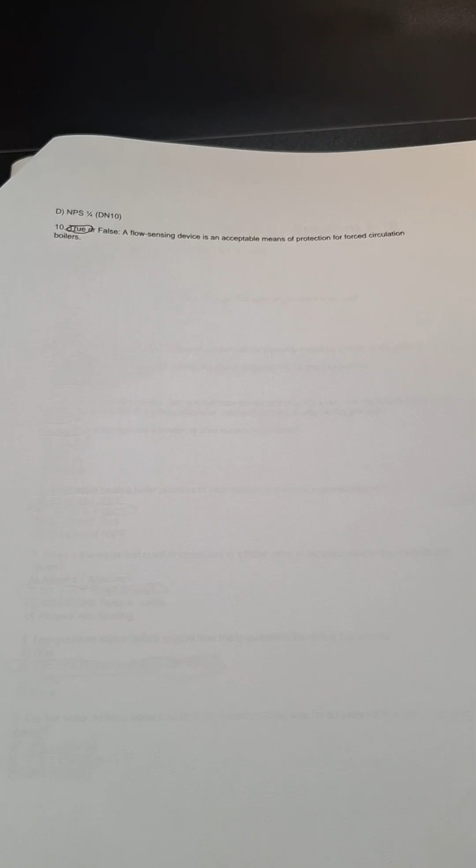All right, so number 10, true or false, a flow sensing device is an acceptable means of protection for forced circulation boilers. I've got that as true.

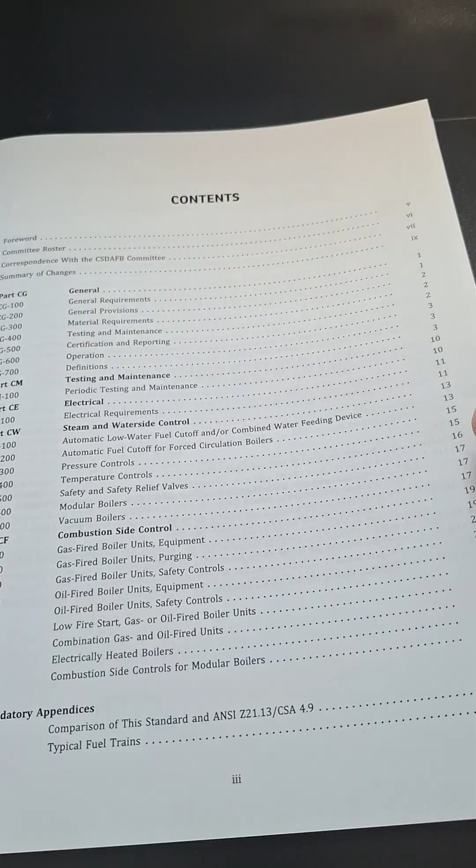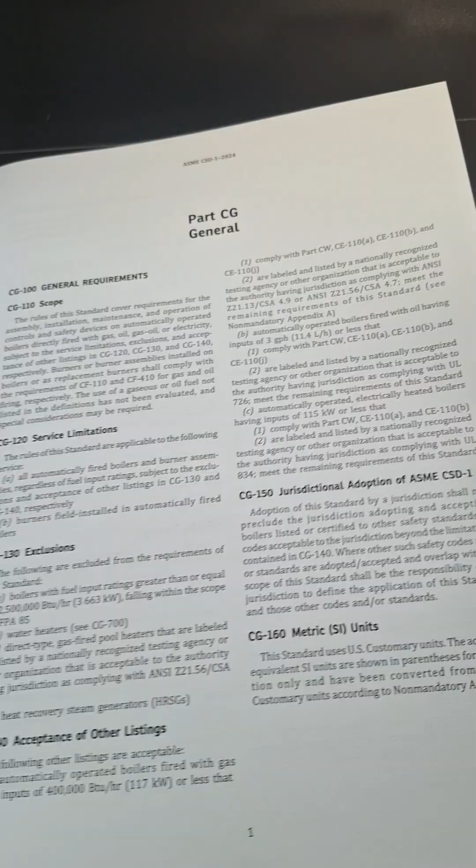All right, let's go over this book, and I'll show you where I've highlighted. It says that you can tab these. I just didn't find it really necessary. What I did do is dog-ear pages, highlighting important parts. But I'll give you a look here if you see something you want to pause and read, if you haven't ordered this book yet and you just want to see what it's about, or maybe you have a previous version of it.

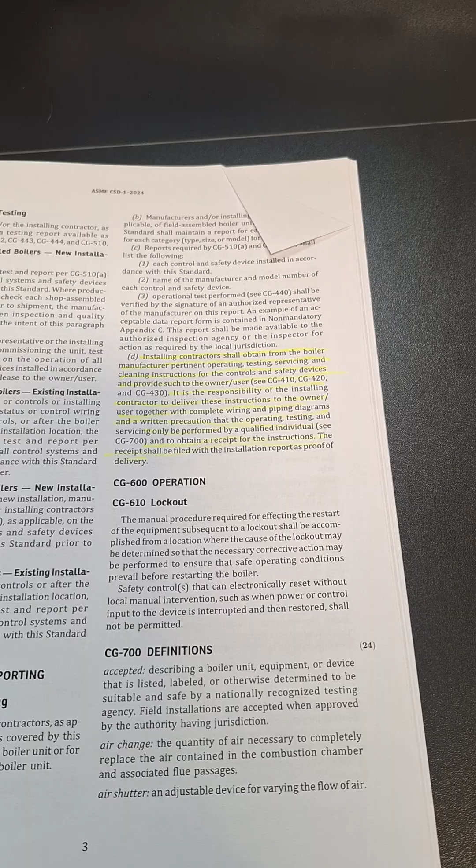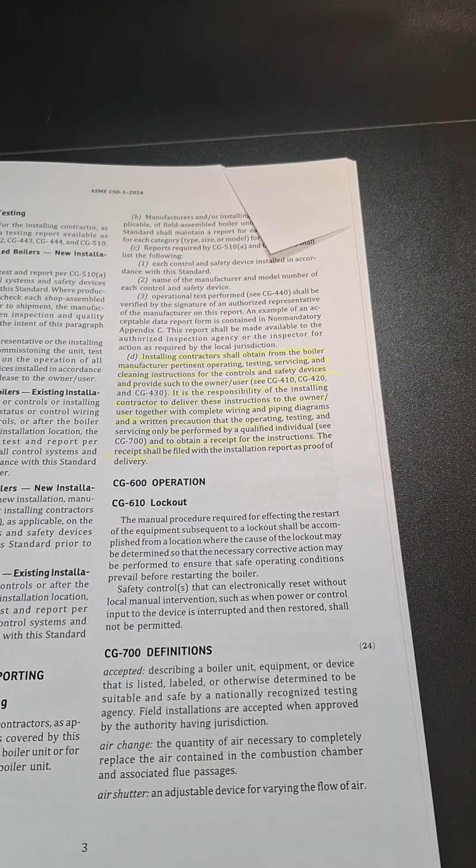Okay, so here's a part. This is about what you've got to leave with the owner, the pertinent operating, testing, servicing, and cleaning instructions. The installing contractor is responsible. That is under CG-510, part D. Okay, so let's see, I thought maybe there was another spot. The other thing too would be knowing your boilers, the limits of what we're able to install when we get approved for this.

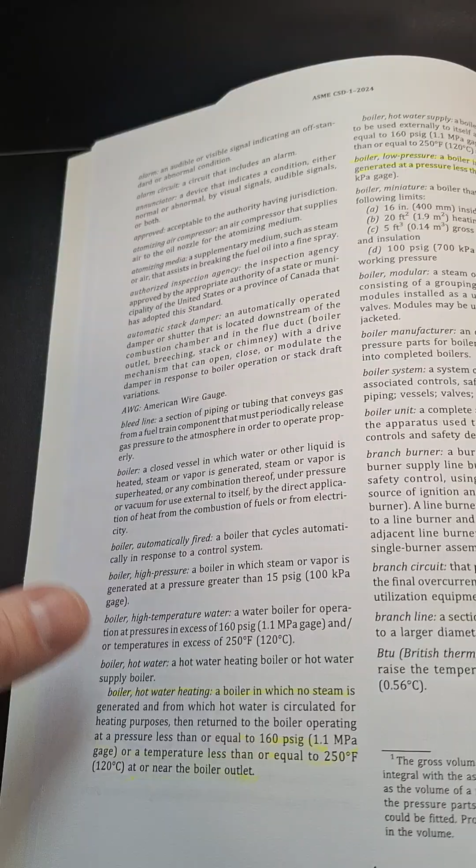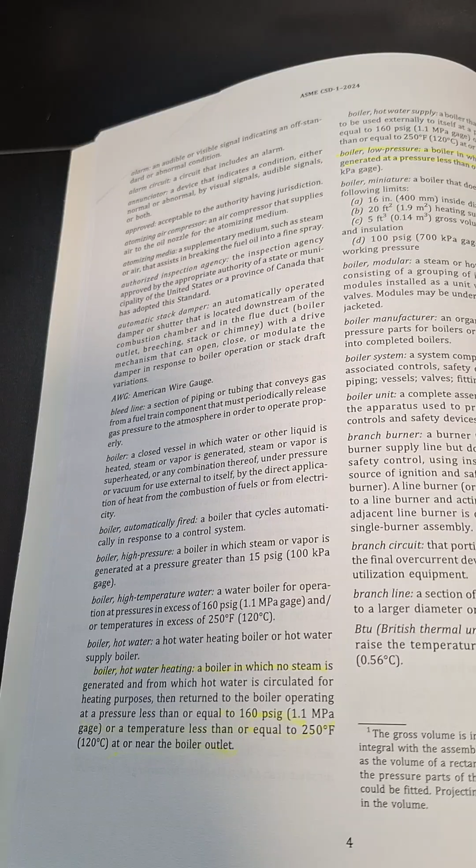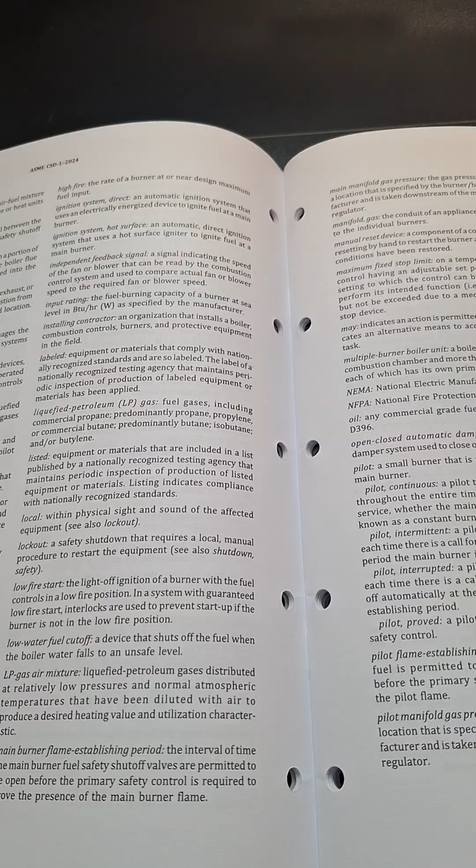Million BTUs or less is going to be the limits of your license. And then also here, this talks about the hot water heating boiler, pressures, temperature. Up here, that's low pressure. And that's going to be just in the definitions there. CG 700. Those were the two that I kind of highlighted. I don't think there was really any other ones that really stuck out at me.

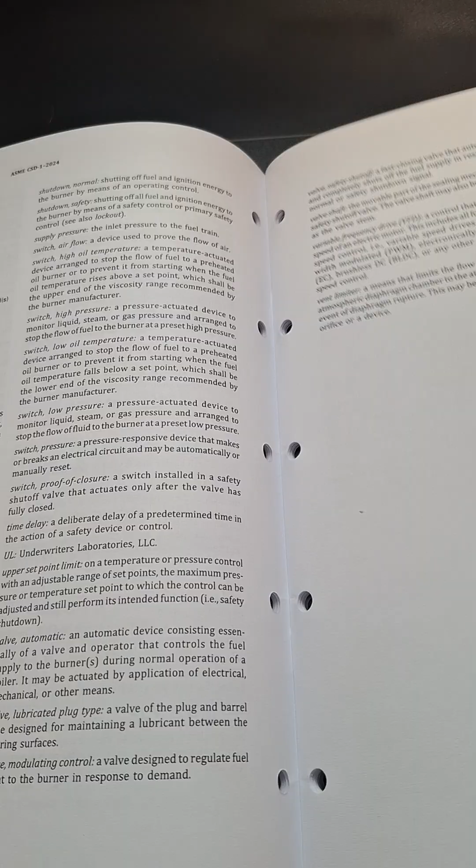I don't think I put it in here as far as where I found the information about stamping, the one we talked about, the HW or H. I think I kind of Googled that one. I don't remember seeing it really in any of my books. That's talking about electrical. Okay, here's the part about steam and water side controls. That's CW 110. I've got section D highlighted.

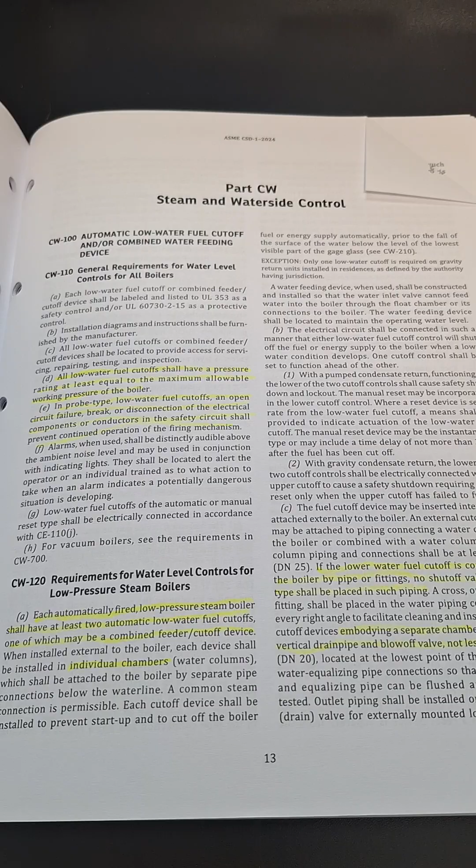All low water fuel cutoffs shall have a pressure rating of at least equal to the maximum allowable working pressure of the boiler. From what I remember, I think there was a question on there about a backflow device. It said something along the lines of a backflow device was not rated for the pressure or temperature of the boiler. What should be done? I think it gave you two options, if I remember right.

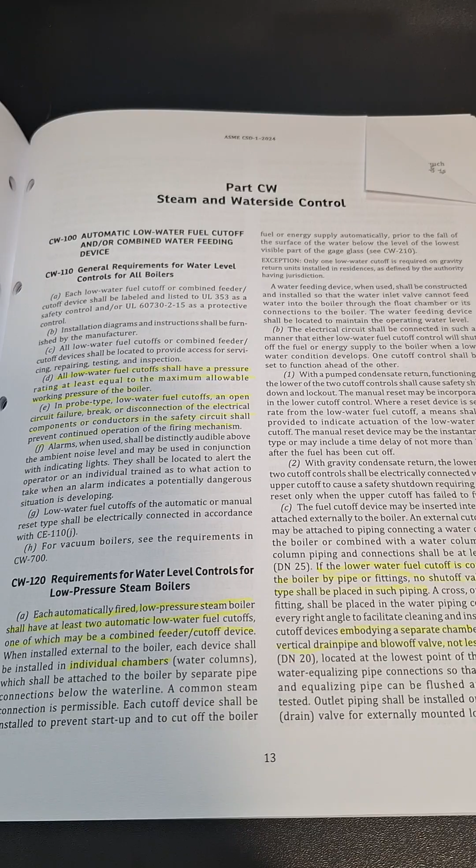I think the first one was remove it, install a correct one that would have the correct rating for that boiler, or option two, which was basically put a check valve in on there. I picked A. I really haven't found that, but this kind of makes me think about, you've got to have proper low water cutoff that's rated for the boiler pressure and temperature.

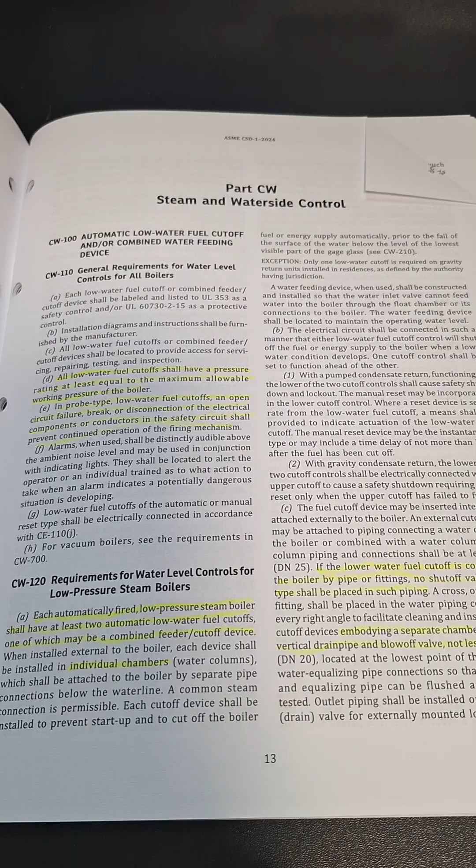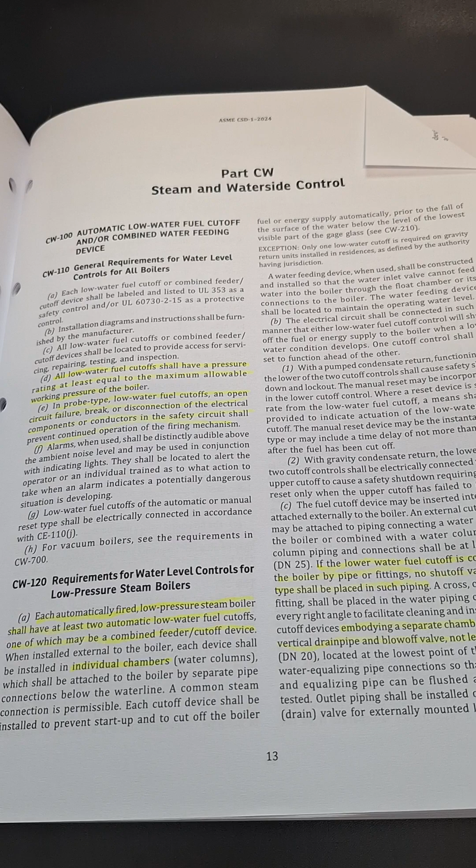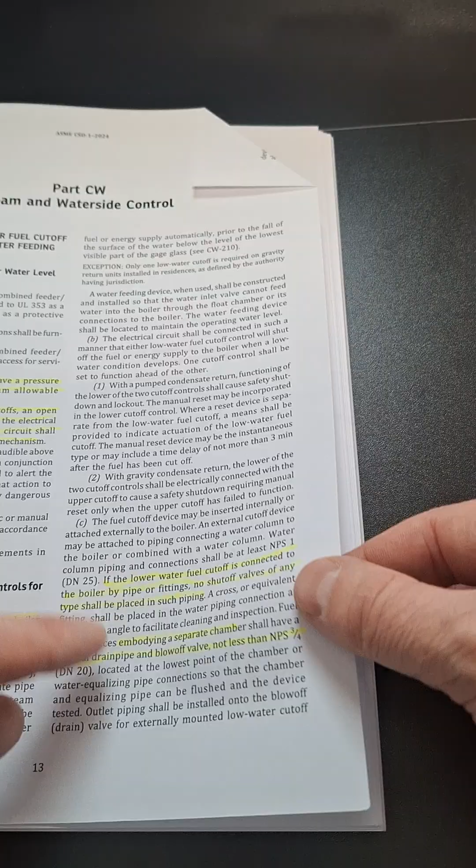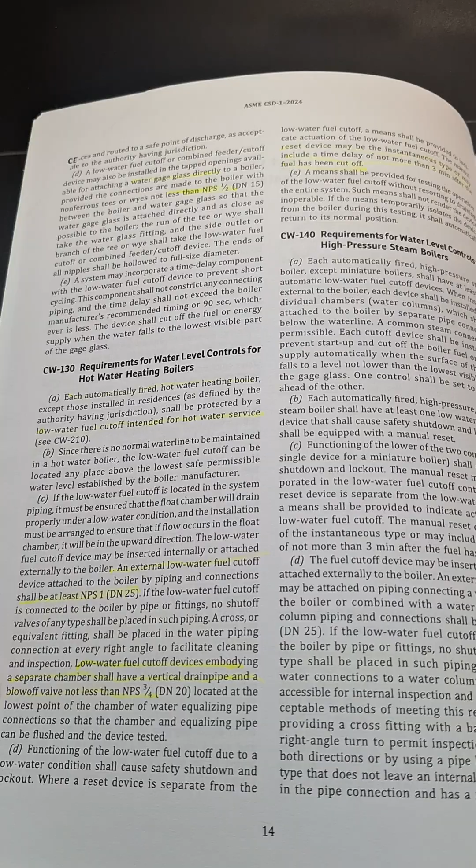Here's the other two here, probe type low water fuel cutoffs. Here's another section, CW-120, about, we talked about having two low water cutoffs, individual chambers. Let's see here. Here's a part about pipe sizing. Okay, and then up here I've got water glass directly and pipe size for that. This is basically talking about hot water boilers, pipe sizing for low water cutoff. This talks about reset for them.

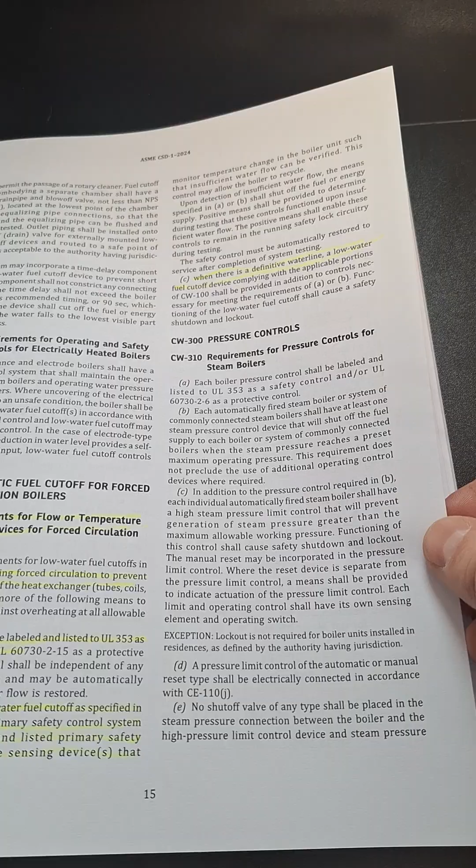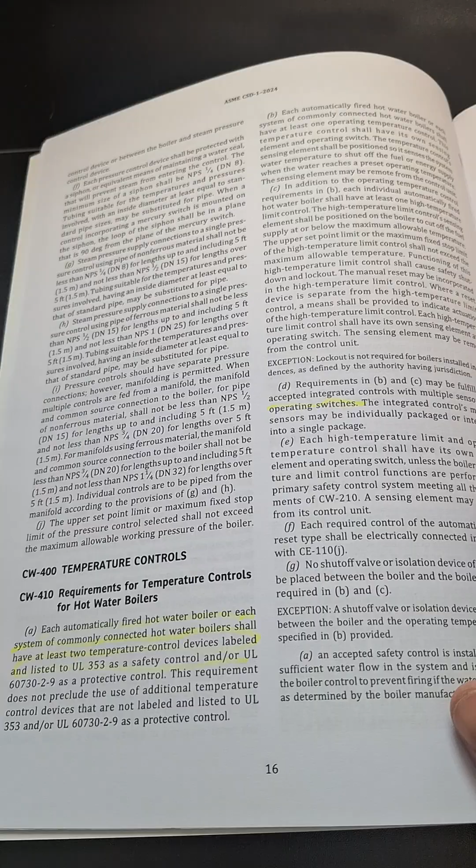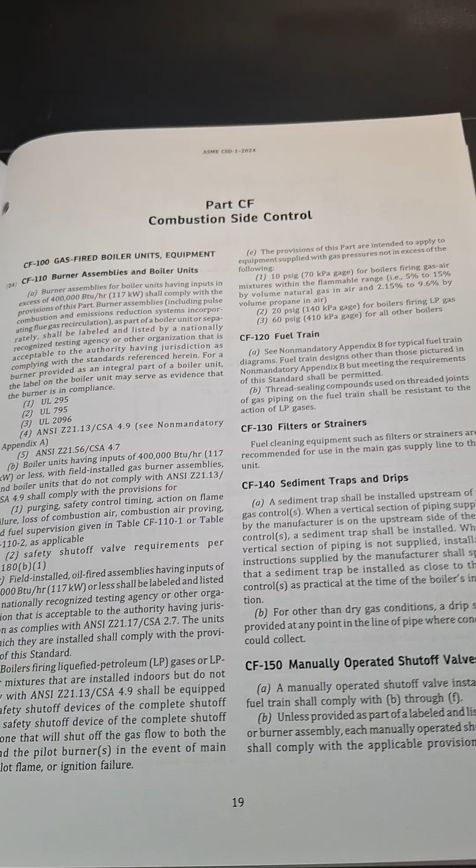Okay, if we come over here, that's talking about boiler requiring forced circulation. A flow sensing device is approved. That's CW 210. Also talks about here a water line for a fuel cutoff device. All right, here we're talking about temperature controlled devices. I don't remember that really being on the test. Right here, multiple sensors and operating switches. I highlighted that section. Okay, that's combustion side controls.

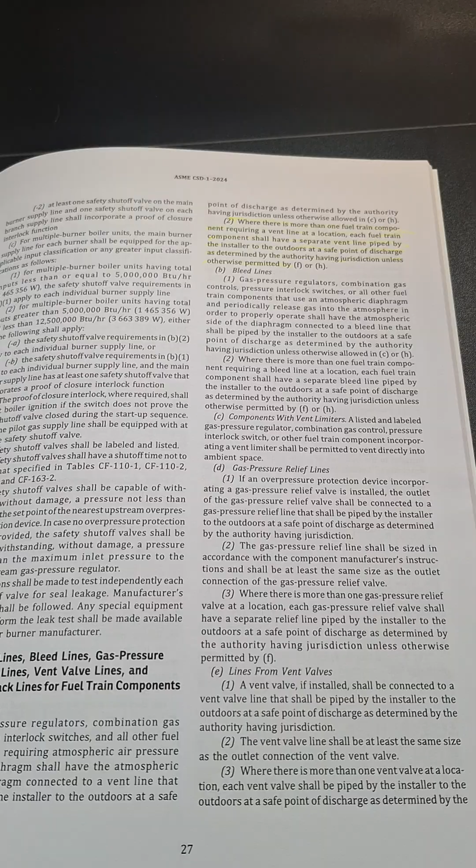I'm trying to keep this moving along. I know if you're trying to study, a long drawn out video with just me turning pages is probably not very interesting, but I want to highlight areas that I think are kind of important. Here, this talks about where there's more than one fuel train component requiring a vent line at a location.

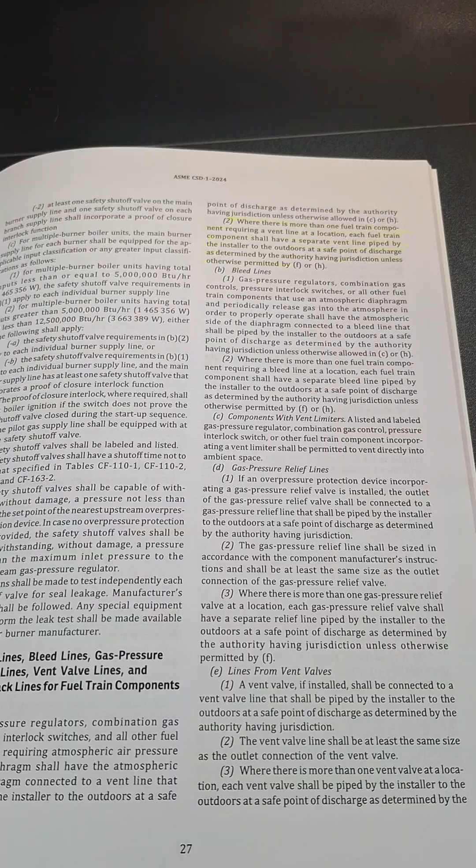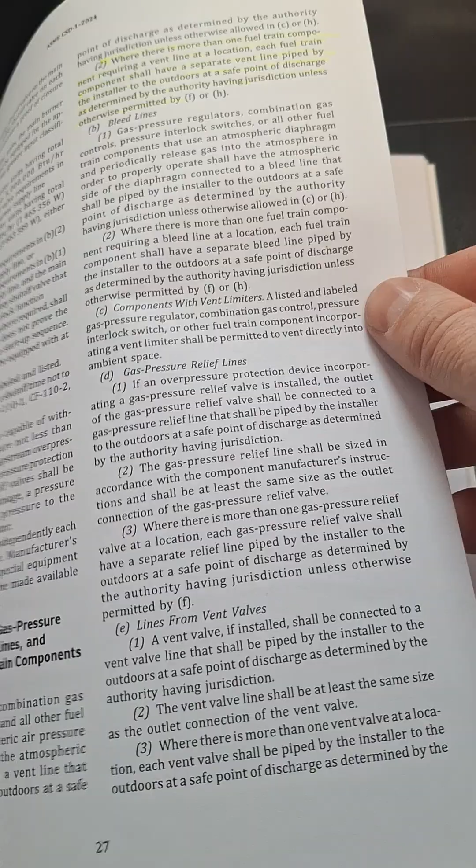Each fuel train component shall have a separate vent line piped by the installer to the outdoors at a safe point of discharge as determined by the authority having jurisdiction unless otherwise permitted by F or H. And here's the part about F. Basically, if approved by the authority having jurisdiction, it talks about minimizing back pressure. The manifold line shall have a cross-sectional area not less than the area of the largest branch line.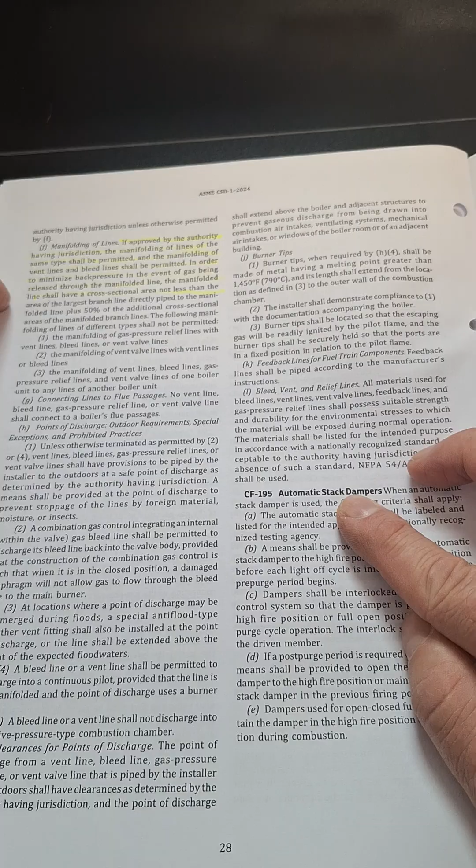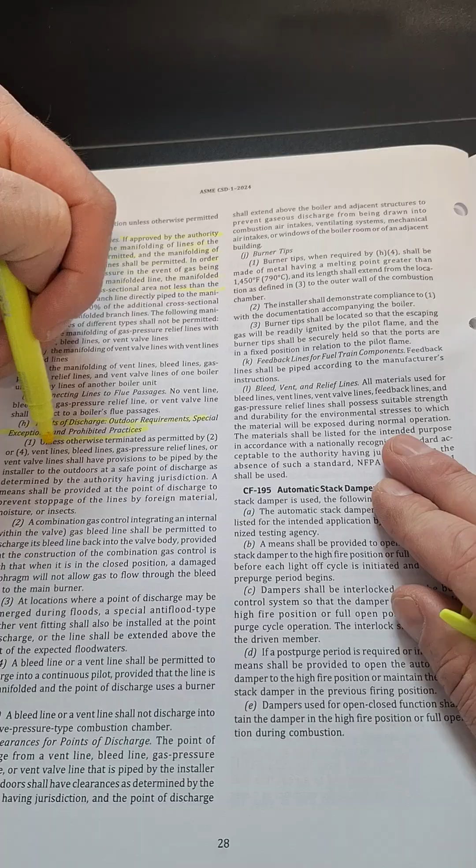Okay, and then we had H. Points of discharge, outdoor requirements, special exceptions. That's right there. Probably should highlight that, because I'm pretty certain there's a question on there about venting the gas trains. So I would say that would probably be an important part to highlight.

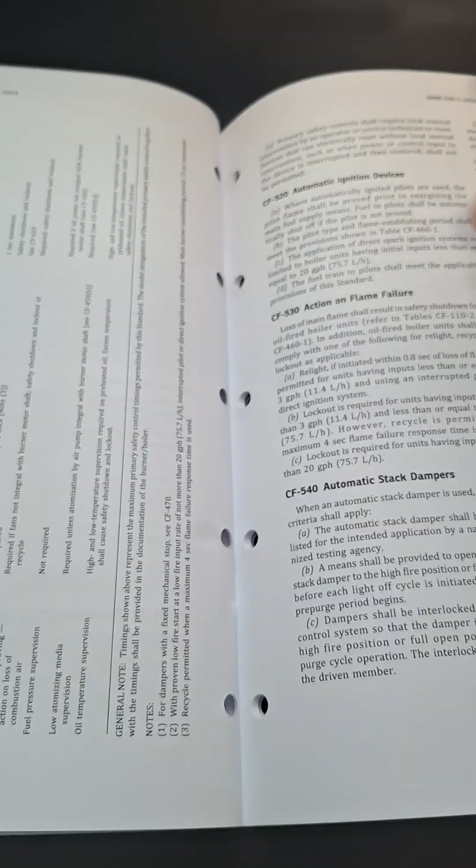Nothing really high, and I would tell you, go through this book. You know the ins and outs of it. Read it. You know, tab it if that helps you. I just kind of dog-eared it.

Okay. Here's the part we were talking about, the CSD-1, the appendix for that, and then it kind of tells you certification and reporting for controls and safeties. That's Appendix C. That's that question I talked about. I think that was pretty much it in here. So that kind of covers this book.

And like I said, we're going to take it one book at a time of each question. We'll do 10. Test is 50. Key points I would tell you that are fresh in my mind right now.

Keep in mind that in Michigan, as far as your license goes, staying in your lane, meaning if you're approved to be licensed in a certain area, let's just say you're approved to be a boiler installer, you shouldn't be running domestic water lines to your boiler. If that's the case, you want to have a plumber come in. If you're putting a new boiler in, that's not part of what you would do.

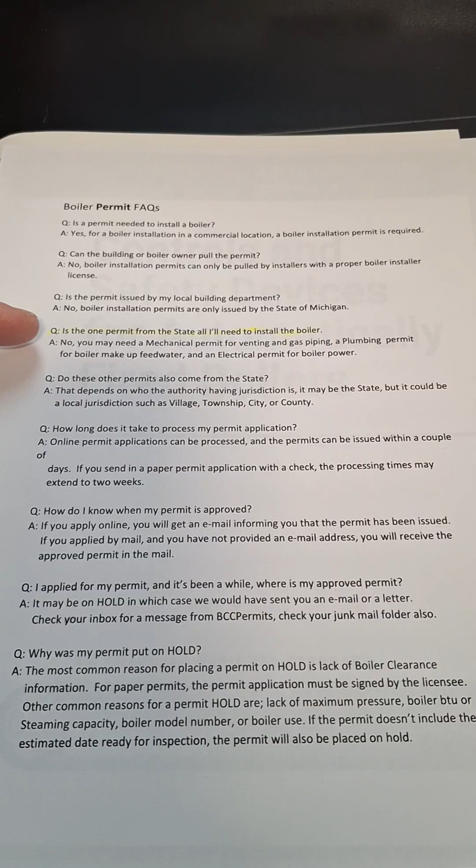Other thing I would tell you is I kind of remember there's a question on there about permits, like who would be able to pull a permit or licensed, which kind of covers the frequently asked questions on the Michigan boiler page. This would be one I would highlight, because I do know there was a question about this: is one permit from the state all you'll need to install a boiler?

No, you may need a mechanical permit for venting, gas piping, a plumbing permit for boiler feed water, an electrical permit for boiler power. Keep that in mind. I would say that's probably an important thing for that test. I remember there was a question on there about sections. Who can repair sections in a boiler? That would basically come down to a boiler repair license. You would have to have that.

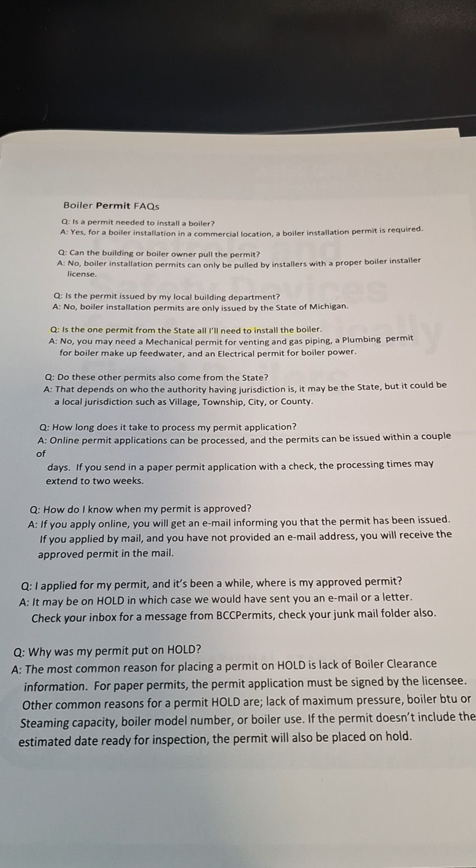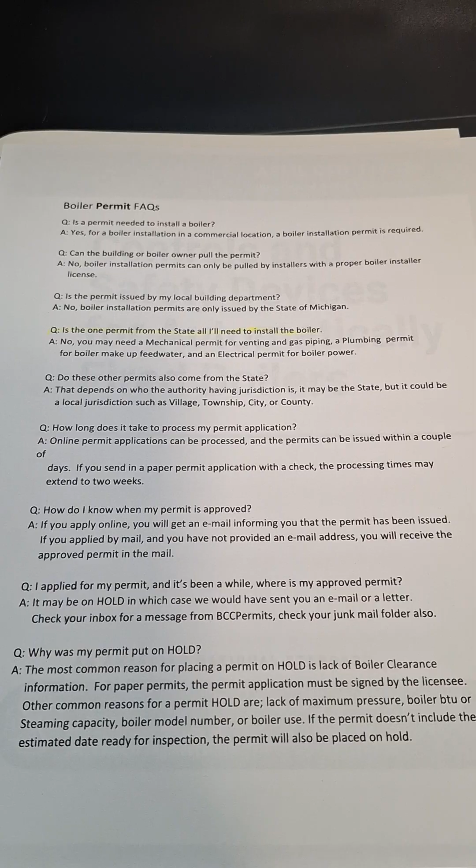I think there was a question on there too about how many permits you would need. I think it was about the sections in a boiler, and I believe for every section you replace, you would have to have a permit for that section. Same thing with the boiler. If you're replacing more than one boiler, you would need multiple permits. We'll get into that because I'm planning on printing off a Michigan boiler permit, and that may have the information on there as well. But let's keep that in mind as far as testing goes.

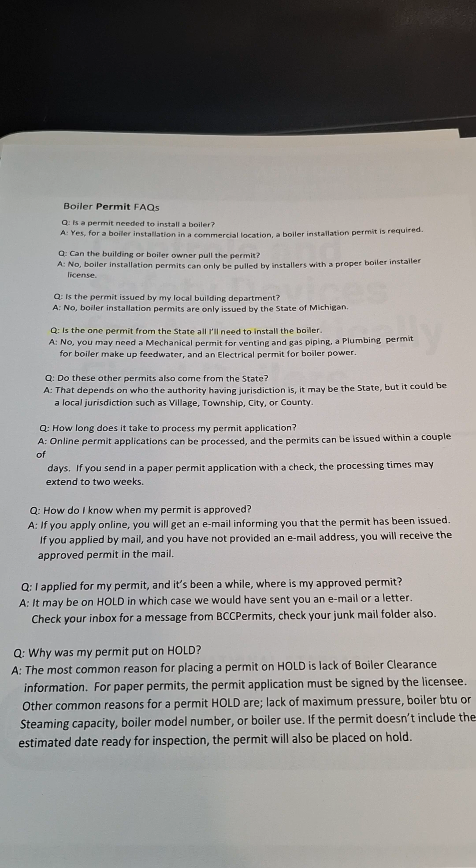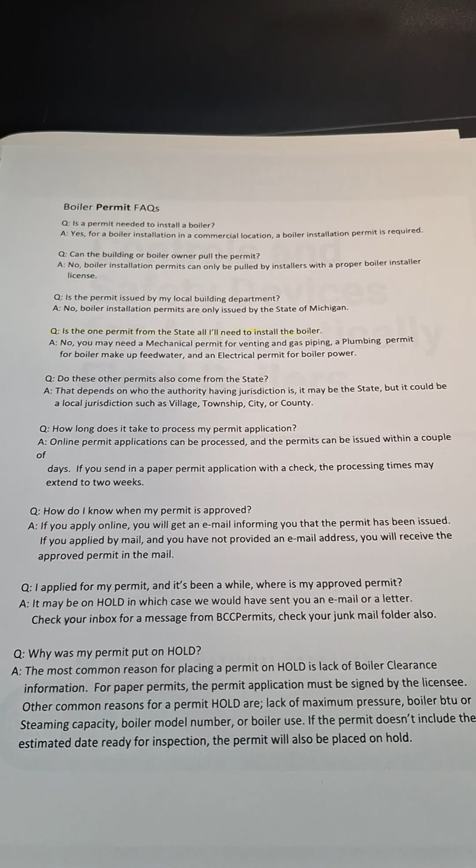I'm trying to think of anything else. Keep in mind, before you can start installation on a boiler, you have to have a permit, and that was the other thing in one of these frequently asked questions. It's right here: "Can I install the boiler, then pull a permit?" No, an approved permit must first be obtained before installation can begin. Applying for a permit is not obtaining a permit. You will know your permit is obtained when you receive the permit by email.

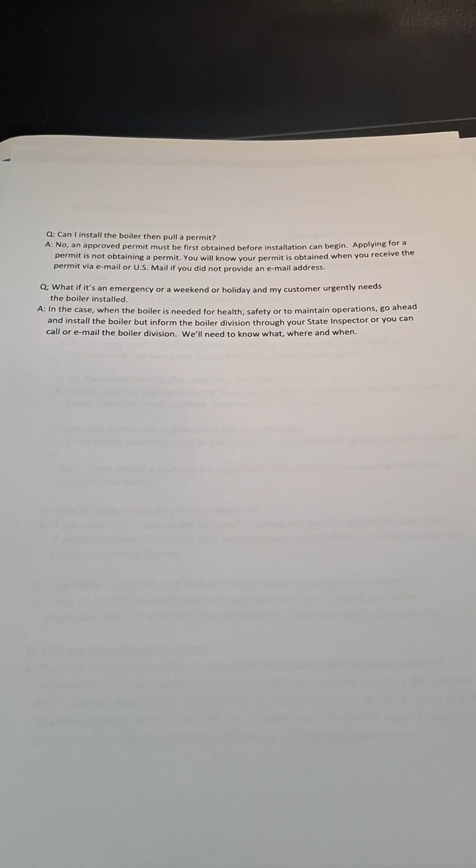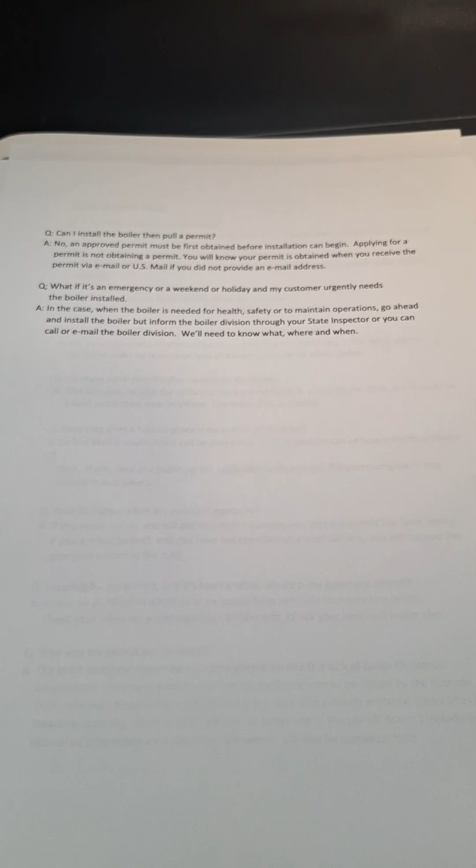Other thing would be, what about emergencies, weekends or holidays, when the customer urgently needs the boiler installed? Basically it says, in the case when the boiler is needed for health, safety, or to maintain operation, go ahead and install the boiler, but inform the boiler division through your state inspector, or you can call or email the boiler division. We'll need to know what, where, and when. So that's the key thing too.

In my mind, when I see these questions, I always try to think stringent, what's going to be required. So that would be the key thing. Don't install it until you have a permit. One of the other things too is starting the boiler. I think that was a question as well, which is basically you've got to get it inspected first before you're actually supposed to fire it up. So keep that in mind. That basically comes down to safety.

Also, there was a question on there, and I didn't like the way this one was phrased, because basically it was worded to the effect of, if you install the boiler and it didn't meet the requirements, that you could lose your license.

Which, to me, that's one of those where if I pull a permit, I install a boiler, it doesn't pass inspection, I'm going to get red tagged on it. I'm going to get the ability to fix what the inspector has red tagged. I'm not going to lose my license over it.

Now, I can see losing my license if I didn't pull a permit and they caught me. Then I could see. But then again, if it's because I didn't pull a permit, usually that's one of those where they fine you. Now, obviously, if you are installing a boiler and you don't have a license, how are they going to pull a license you don't have?

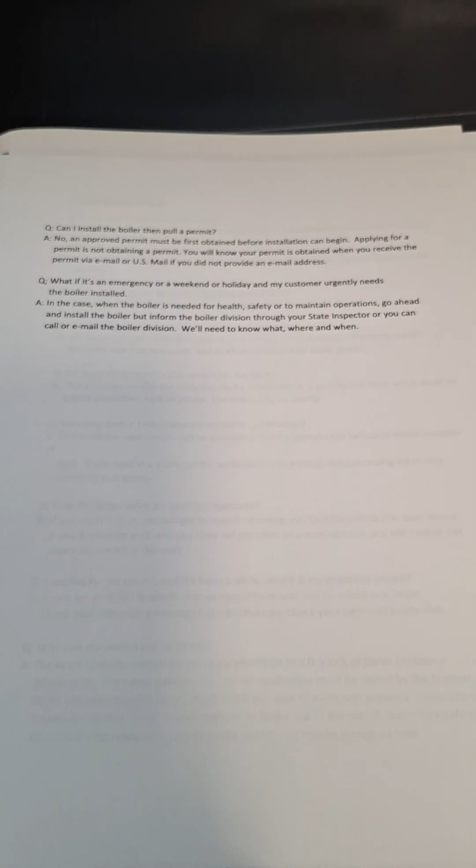And like I said, thinking along the lines of stringent requirements from the state. So, maybe they want you to say, yes, true, that they can pull your license. But like I said, I'm looking at it from the standpoint, if you didn't install it correctly, I can't imagine them pulling your license from that. But that would be one of the questions as well. But I would say, if you get that book, kind of highlight those areas. That would be the key thing.

Size requirements, as far as pipe sizing, not necessarily like discharge pipe sizing, but those areas that I kind of highlighted. Knowing that the gas train vents have got to be vented to the outdoors, you can tie them together only if it's accepted by local authority, which I can't remember how that was phrased, but I would just say, kind of keep that in the back of your mind. I'm trying to think of anything else on this section. I'm trying to keep this video short, so you can kind of cover these books.

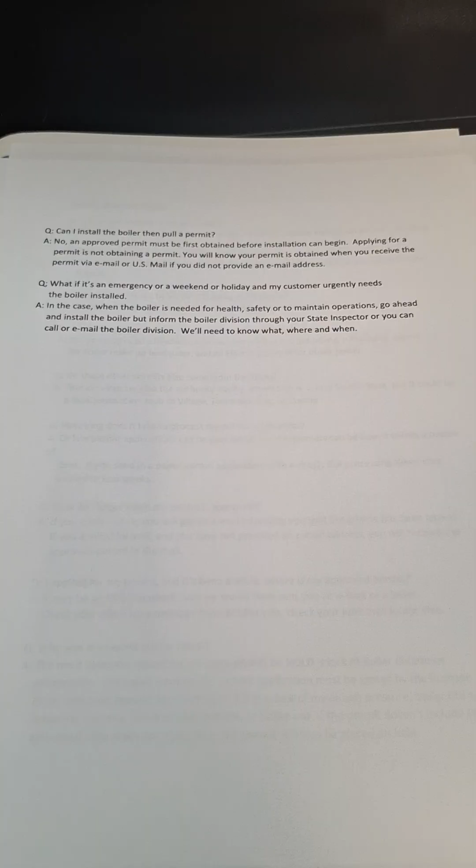We'll do sample tests, but I would say, know the boiler, the low pressure boiler, the 15 psi, the hot water boiler up to 160 psi, 250 degrees. If you know that, I'm pretty certain that was a question on there, because you got to basically know what the test is as far as your licensing requirements.

One of them I'm thinking of is the CSD1 testing that was on there. Who can test controls? I think it said boiler installer, boiler repairer, mechanical contractor holding an unlimited license, and the person that's going to be able to test these controls is the mechanical contractor that has the unlimited heating service license.

So I would say, know that. That's not really what we're testing for, but that goes back to staying in our lane. Even though we're an installer, if we're going on a CSD1 report, technically, unless you have the mechanical unlimited heating service license, you can't test those controls. I think other than that, that's pretty much it.

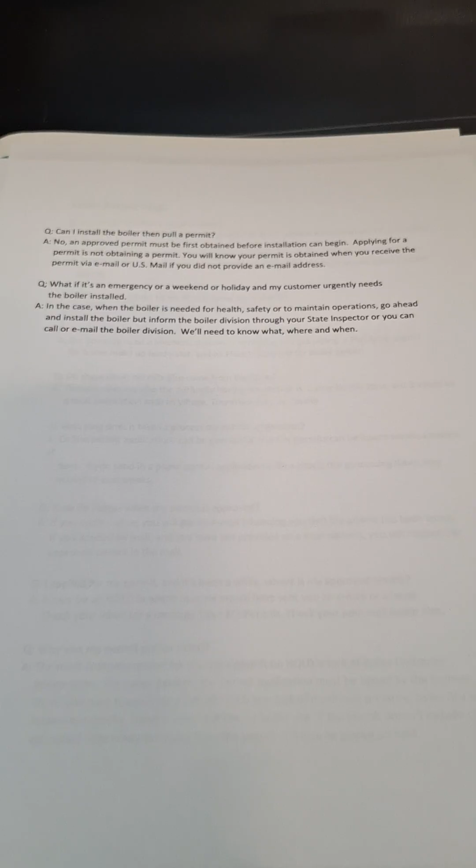But my goal here is to help. Obviously testing is not cheap. The state saying to look at these books or know these books would help you pass the test, but that doesn't give you an idea of the test because there's no real sample test online. I tried using AI to help create questions. It wasn't as thorough. Any question that they had created, I didn't really see on the test.